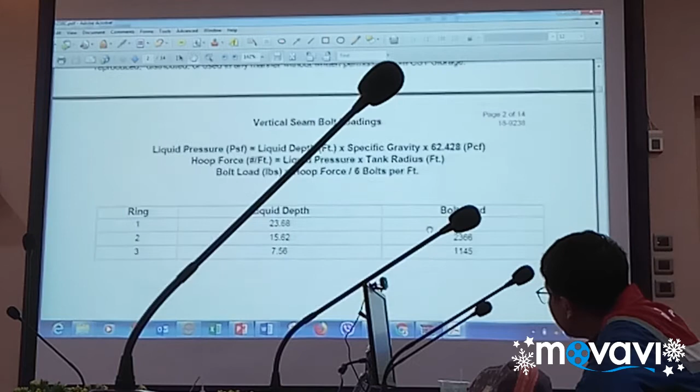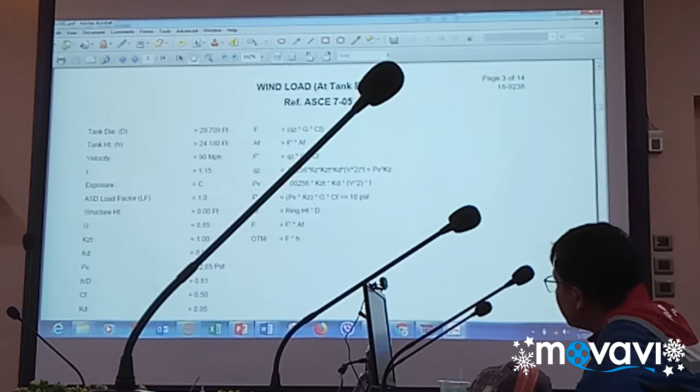All of the design assumptions for the geometry of the tank, what we're storing, the specific gravity, and the design standards, of course, the wind and exposure and importance factor that goes with that. And then through each page, we go through the design calculations showing, for example, in this case, the wind load, the input data, the calculations, the formula that goes with that, and the output data of the actual result.

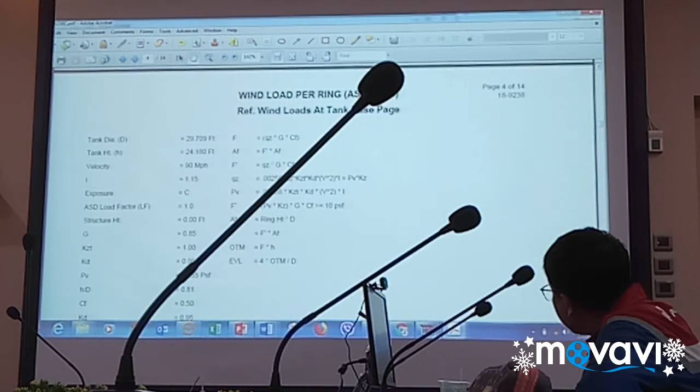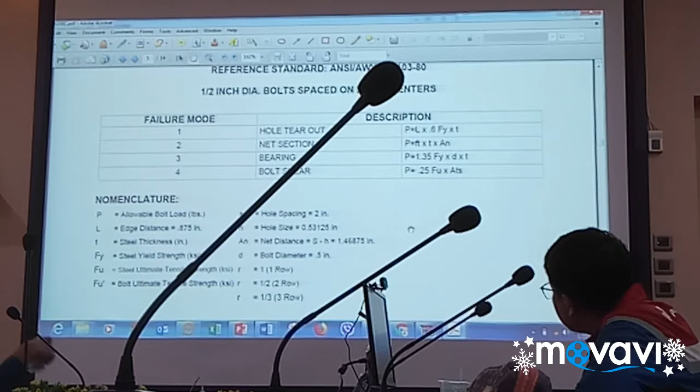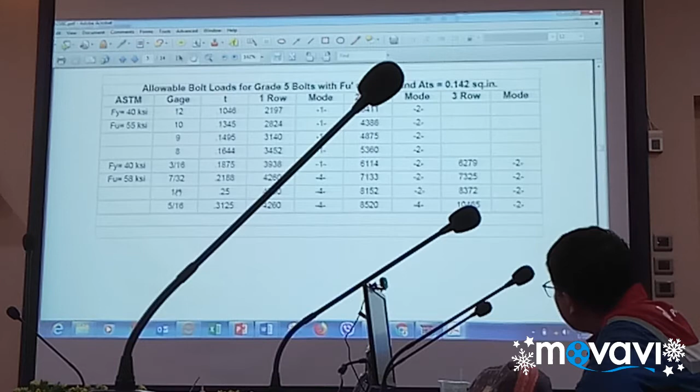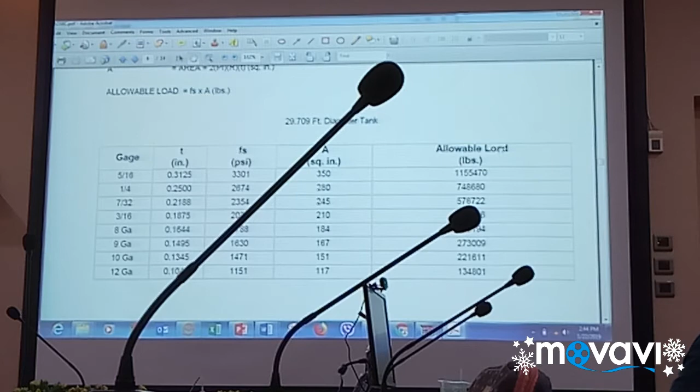And then an analysis of hoop load stress for each ring. We look at bolts and bolt stress and the tear out associated with that and shear and what's allowable. It therefore shows us the row of how many bolts, 1 row, 2 row, or 3 row for each thickness that is involved. This gets us into the allowable shell. So for each thickness, this gives us the allowable loads associated with the diameter of this tank. Shows the formula here.

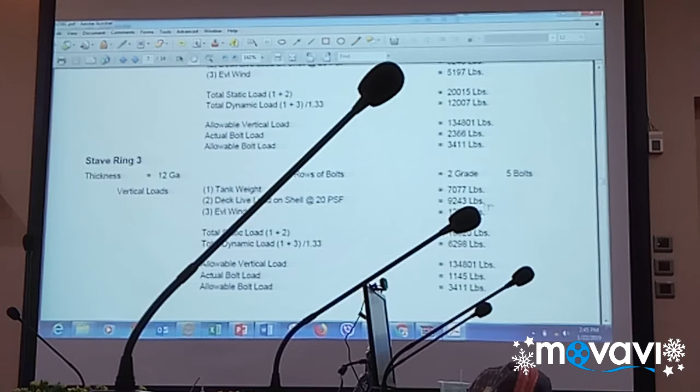And then following the tension loads on the chimes, following the AWWA standard, D103-97. Looking at overturning of the whole tank, turned over, looking at that analysis.

Very exciting for someone in this room to study, I'm sure. But not me.